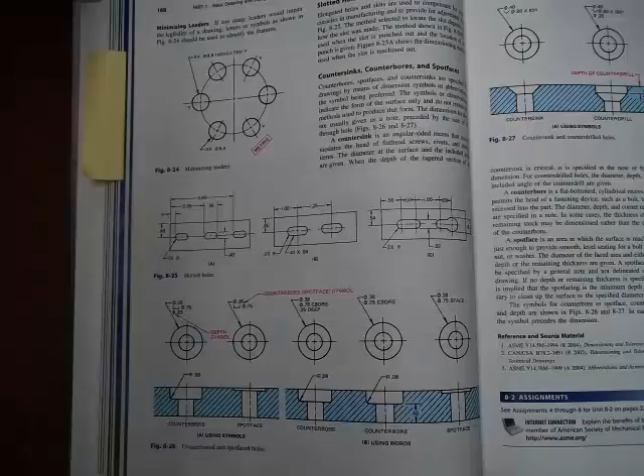This is in your book on page 188 in the dimensioning section. And we're going to take a look at counterbore and countersunk holes, like I said. We've also seen spot face holes already. We can see a spot face one here, and you'll remember that with the spot face, we're given the diameter of the spot face, but not a depth, because we just wanted to cut in enough to get a nice smooth surface. So we said maybe a millimeter or a 1/16 of an inch on those.

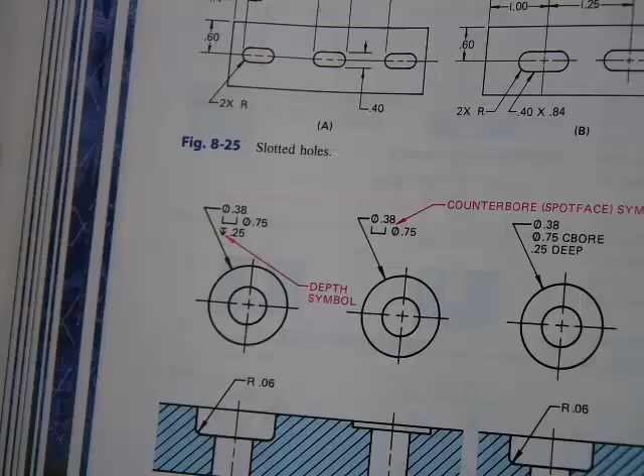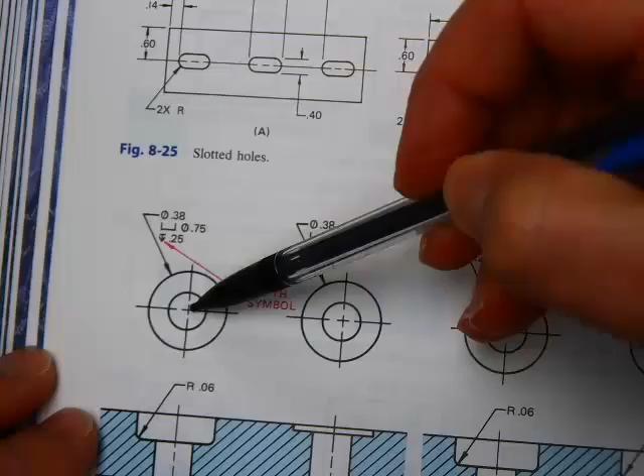Looking at a counterbore though, the way that we call this out, a few things that I want you to take note of is, first of all, that again we use a leader that's pointing towards the center of the circle. So for that reason, I typically start with the diameter tool instead of just the leader tool, so that's pointing. You start with the diameter of the inside hole. And sometimes you'll see through written on there, and that's not necessary. We typically don't put that as part of the dimension.

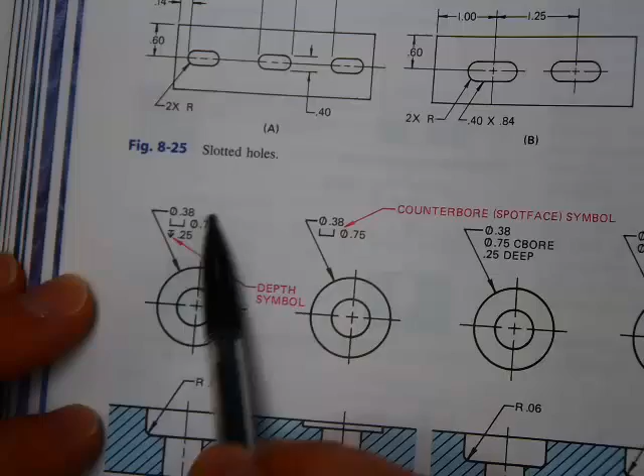A lot of times you'll see it on exercises because you're given an isometric view and you can't tell if the hole goes all the way through or not, so you'll see through written on there. But just by itself, this means that the hole goes all the way through. Just like if all you had was a hole note that said that, it's assumed it goes all the way through since you're not given a depth.

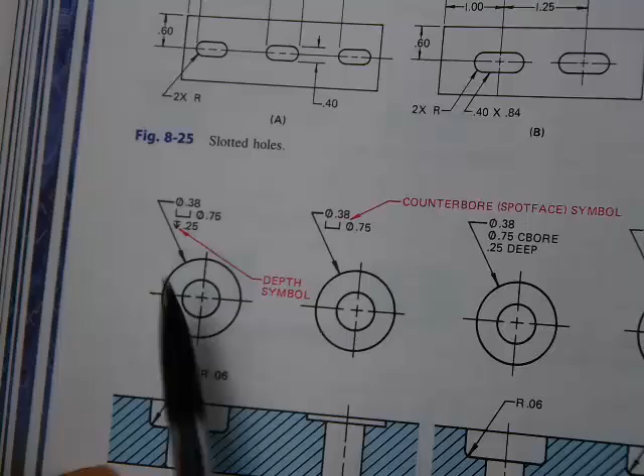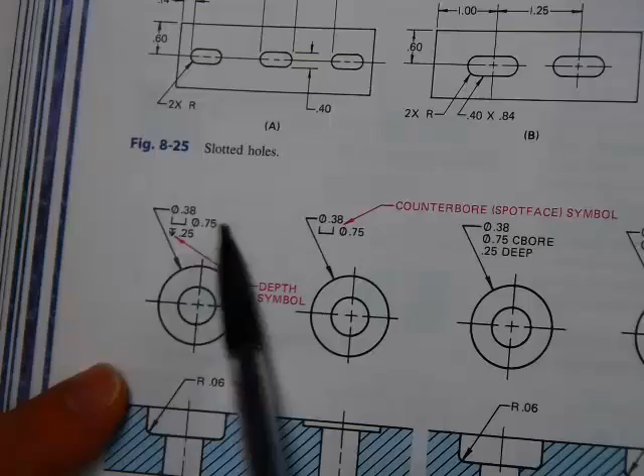So that's our counterbore symbol for the larger diameter, and we're told the diameter of it, and we're told the depth of that counterbore. So it's a hole diameter, counterbore diameter, and then depth when doing a counterbore. And we'll do squared off edges, so we won't have to worry about calling out the radius on these. So here's an alternative where it's actually using the text. You'll see that occasionally as well, but we're going to use the symbols in here. That's typically the ANSI standard.

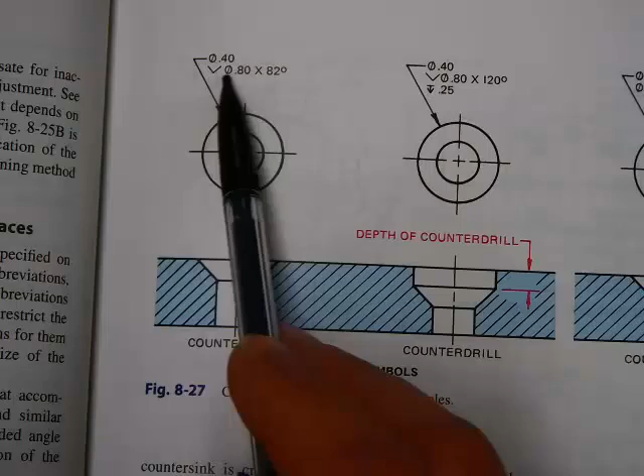And then if we take a look up on the next page on the countersink holes, this is where you've got the angled cut in so your fastener can sit inside there. And once again, you start with the diameter of the inside hole, and then you have the countersink symbol. And sometimes you'll see it in books where it looks like the letter V. We actually have a symbol for this that I'll show you. And then the diameter of the countersunk hole.

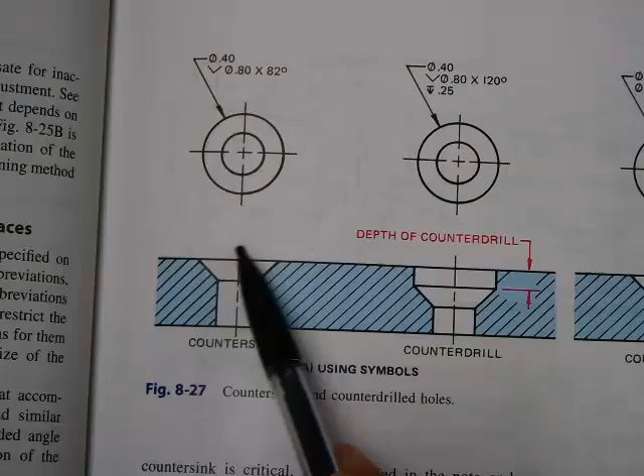And instead of giving you a depth, we do the included angle. So the included angle is from here to here. So a couple of standard angles that you'll usually see are either 82 degrees or 90 degrees. So when you do one, don't just assume it's 82. Check the angular dimension and see what that value is. And then again, we got a symbol for the degree as well.

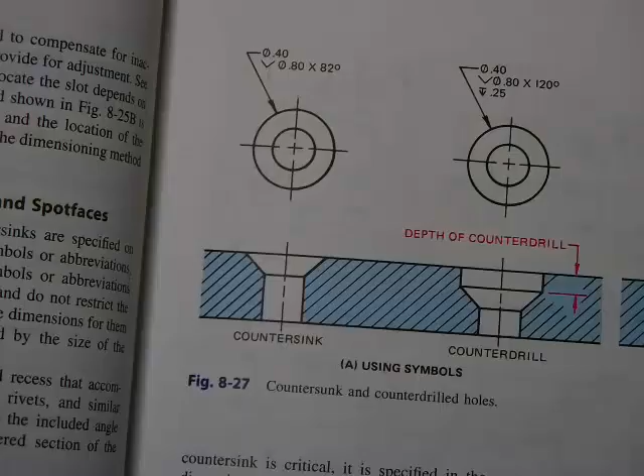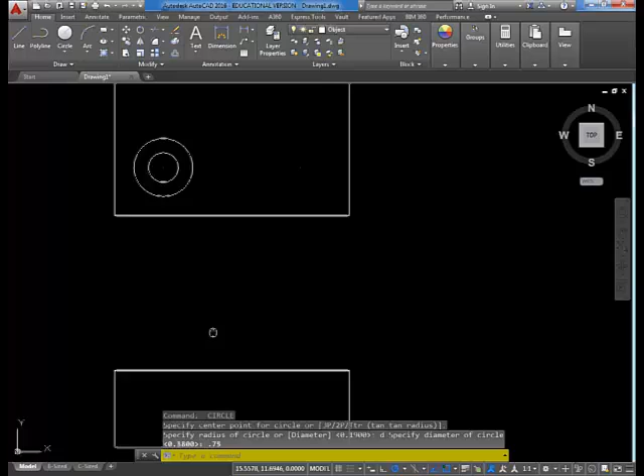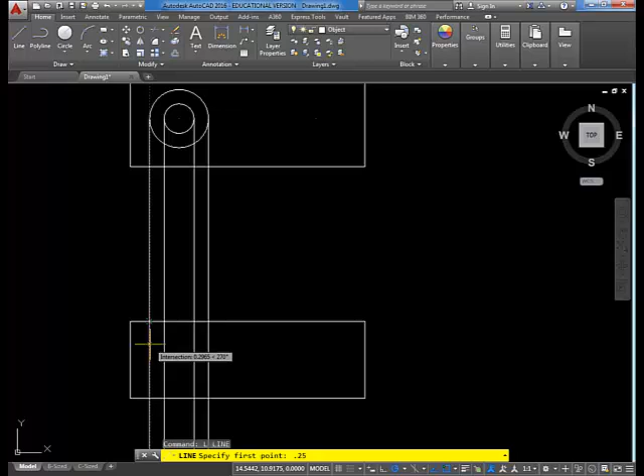So I'll use these couple of hole examples and add them into AutoCAD so you can kind of see the process there. Let me start with the counterbore hole. So it had a diameter of 0.38 and then a counterbore diameter of 0.75. So then as I draw that into the front view, I'll use some rays here. I'm going to go from the quadrants down. And then the counterbore depth we were told was 0.25. So I'm going to track down 0.25 here, and that will be my counterbore. So now to trim out.

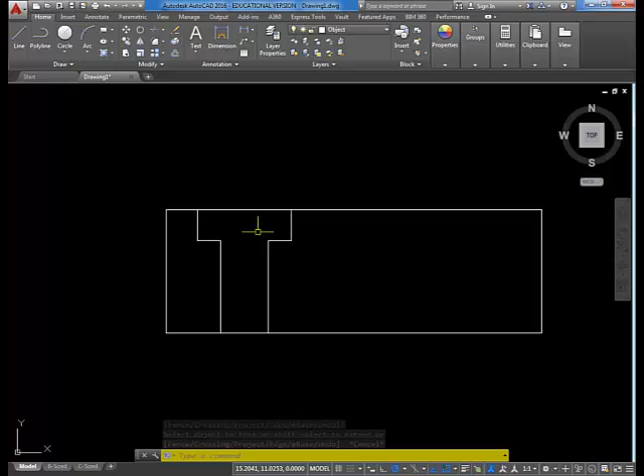There we go. The number one mistake I see on the counterbores is people have a tendency to leave this line out. And that's two different diameters of cylinders. So there's a flat surface that wraps all the way around. So that line needs to stay there. And of course, this one is going to be hidden. And then I can go ahead and draw my center line in there as well.

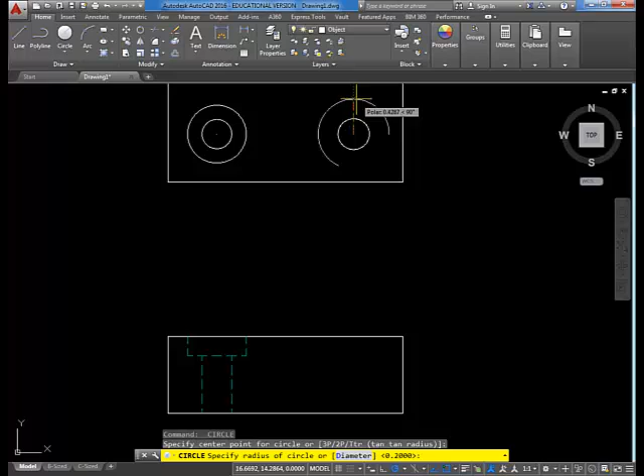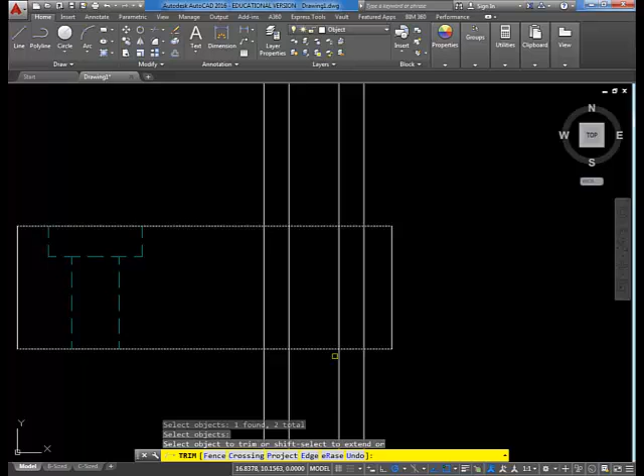So then let's take a look at the other one, which again is a diameter of 0.4 for the hole and a diameter of 0.8 for the countersink. So again, I'll use some rays to extend these down. So this time, instead of a depth, I'm going to have to use an angle to figure out the countersink, what that looks like. So if I've got, let me draw in a little center line here real quick. Let's try to come with this.

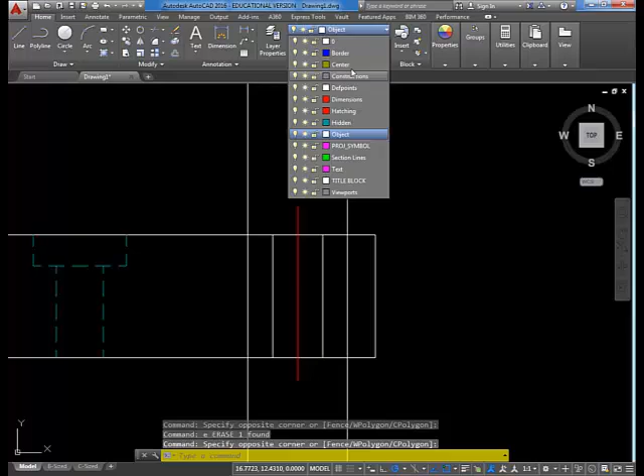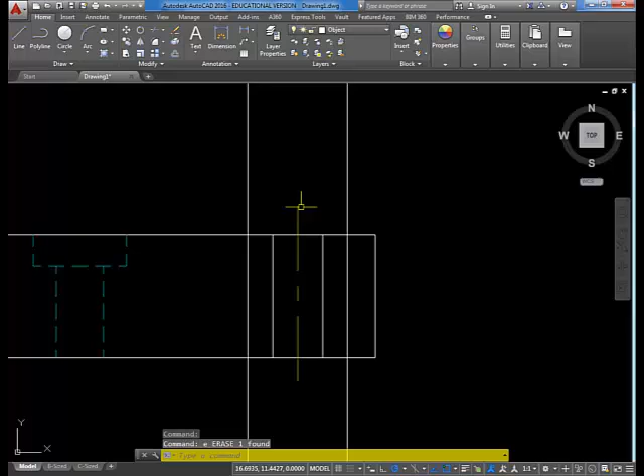Okay, so if that's my center, and I'm talking about an 82-degree included angle, then that means that from this line over, if I had a line here, it would be 41 degrees between these two, and then same thing on the opposite side. So various different ways I can do that. I'm just going to rotate this line from this intersection. And I want it to go counterclockwise, so that's positive, so I'm just going to put in 41 and enter.

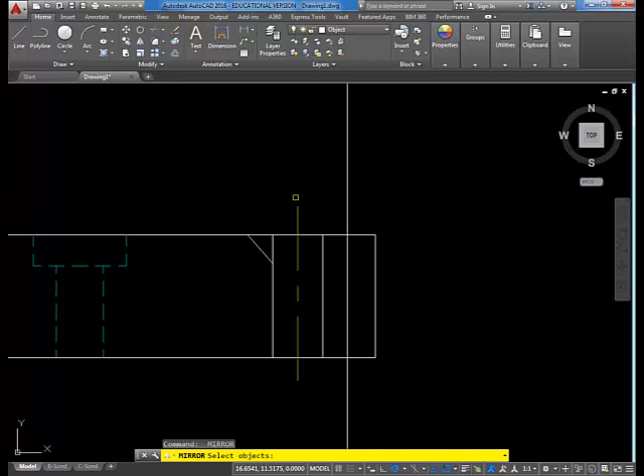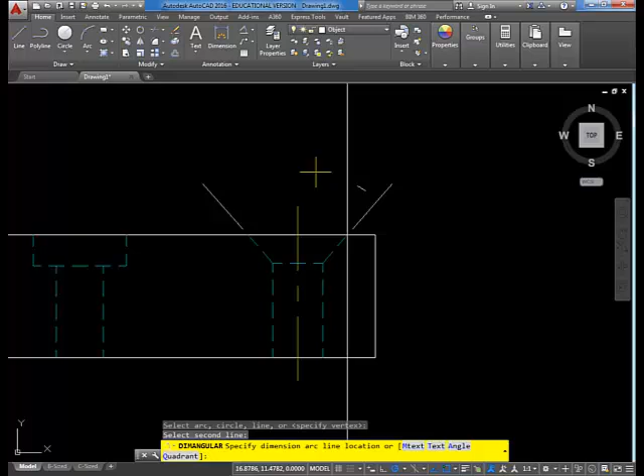Now I could do the same thing on the other side, but I'm going to save some time here and mirror it. So I'll mirror it about this center. Whoops, I should have hit enter there. Let's do that again. And then connect that across. Do some trimming. And then again, these will all be hidden now. And then I'll double check myself on my angle. And there you can see the 82-degree included angle that needs to be there.

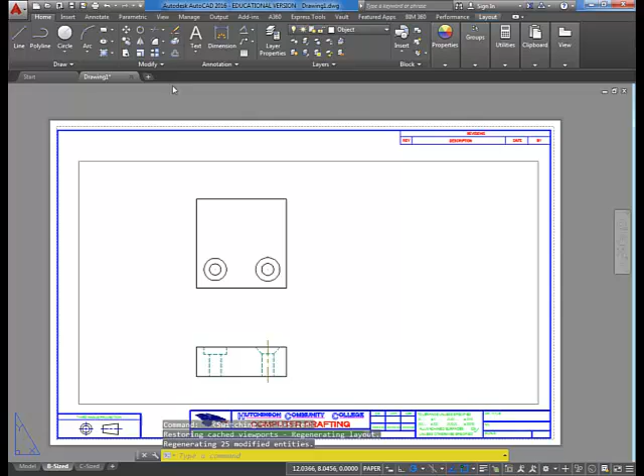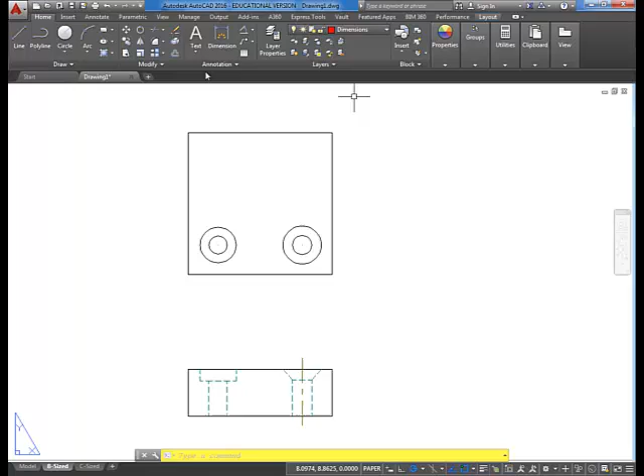So today you'll be drawing up and dimensioning, but sometimes you'll be given the views and you've got to add your dimensions, so you'll need to pull some angles in. So then to finish this out and actually call out the dimensions, I'll hop over to my B size tab. And like I said a while ago, I would not recommend using the leader tool because you can do it and eyeball it and point it to the center as best you can. And that's fine if you want to do that. But just make sure that it's actually pointing convincingly towards the center. I typically will go ahead and use the diameter tool. It also saves me a little bit of typing as well.

So I'm going to call this one out. Again, pointing to the outside one. I'm going to double click on it. I'll start with the 2X since there's 2 of them. And then I've got to start with the inside diameter. So for my symbols, you can come up top to symbol here, diameter right there, or you could type %%C. So I've got 2X a diameter of, I guess I'm doing my countersink one first since I started with that, 0.40.

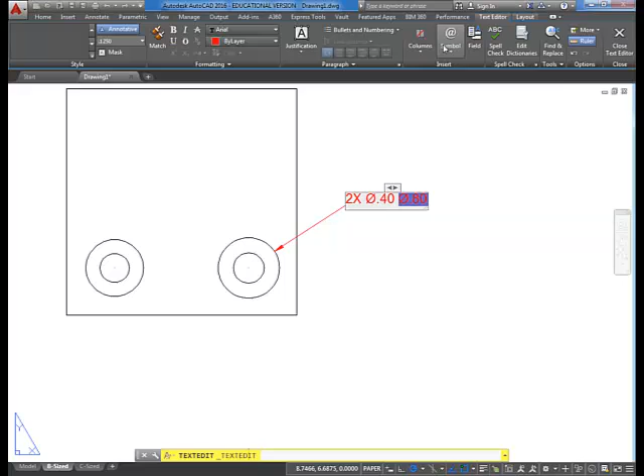And then now I want the countersink symbol. And I'm going to come back and do my symbol last. Well, it'll be okay on this one. It's the counterbore where it's kind of goofy. So I'll go ahead and put in my symbol. So I'm going to go to symbol. You're not going to see the counterbore symbol up here. You've got to go to other to bring up the symbol dialog box. And in the symbol dialog box, you need to be on the GDT font. So if it's on anything else, scroll to GDT, which stands for Geometric Dimensioning and Tolerancing, and it's something we'll be doing here in a couple of weeks.

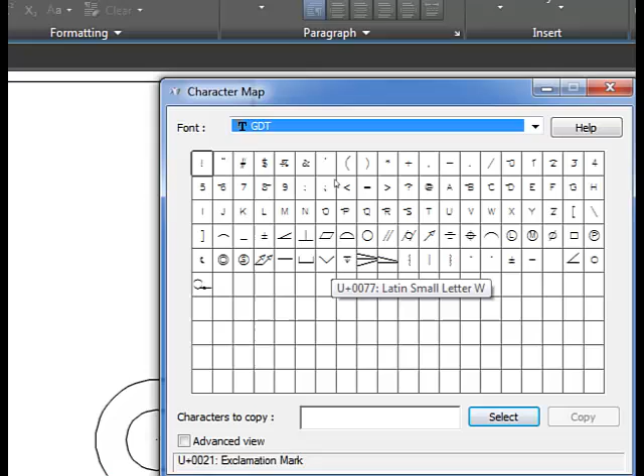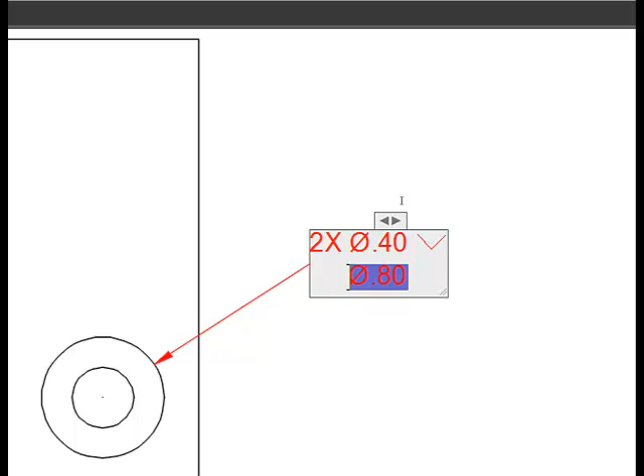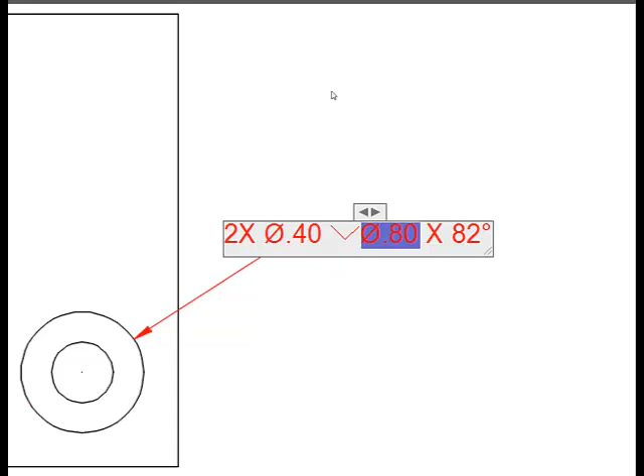But here you can see my, oh, I'm sorry, I'm doing countersink on this one. So here's my countersink symbol. So I'll just double click it to where it shows up in this box down below, and then it's a copy and paste. So I'll hit copy and close this. Then I can come back in and Control V or right click and paste to put the symbol in. It always puts an enter after, so I'll just backspace. Now I'll arrow to the end, so I've got a countersink of 0.8, and then when we're doing something by something, we always put spaces in between. And so then I've got 82, %%D for degree, or again I could use the symbol drop down. So again, remember if you're doing a count, you don't put a space between them. If you're doing something by something, you put spaces between them. So that'd be the appropriate way to call that one out.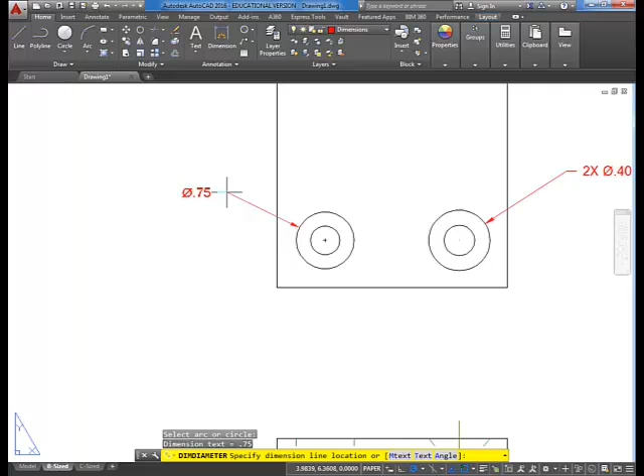And then if I'm doing the counterbore, then I'm going to, again, start with the diameter tool on the outside one. And then as I edit this one, again, I'll start with 2X. And then the inside diameter, so I'm going to go %%C for my diameter symbol. And then the inside one was 0.38. And then I need my symbol for the counterbore, but I'm going to hold off on that. I'm going to arrow to the end, and then I'm going to go ahead and put in my depth value of 0.25. Then I'm going to come back and put my symbols in, and I'll show you why in just a minute.

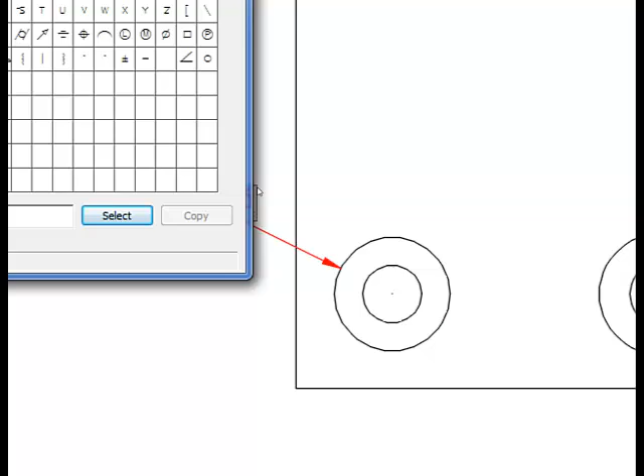So now if I go back to symbol, other, then I can go ahead and bring in my counterbore, copy, and then Control V to paste, and backspace. And then now I can come back in and put in other, and here's my depth tool, copy. Again, I can close this and then Control V to paste. So I've got 2 holes with a diameter of 0.38, counterbore diameter 0.75, depth of 0.25.

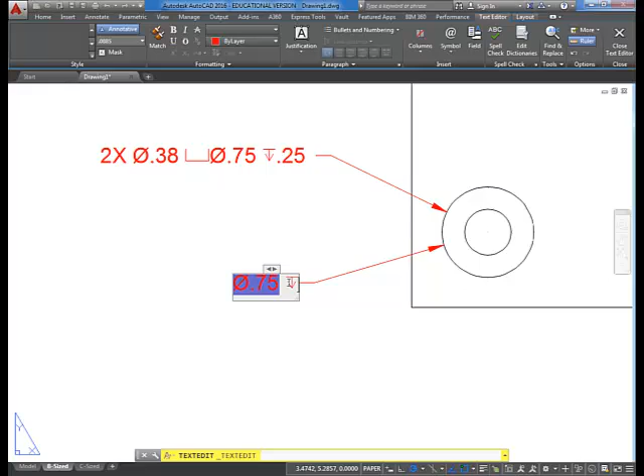I'll show you why I like to do the symbols last. Here's what happens if you don't. I'll just do the last part of it. If I go in and put in my depth symbol, it changes the font size. So then when I get to 0.25, I've got this weird font size, and I've got to go back and mess with it and adjust it. I think it's easier to just put in your values and do your symbols last.

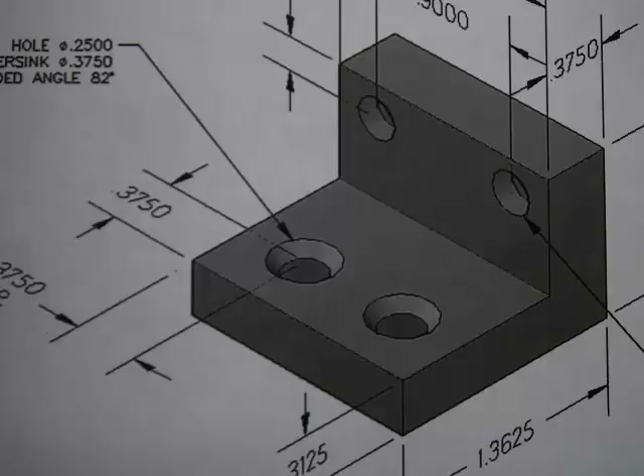Alright, so I'm going to pass this out. It is a pretty simple shape with some holes in it. So I've given you the notes of what sizes the holes are, but I didn't write out the note exactly like it should be done. So again, consult page 188 and 189 as you're doing those. So 3-view drawing with all your hidden lines and center lines, and then call out the holes appropriately.